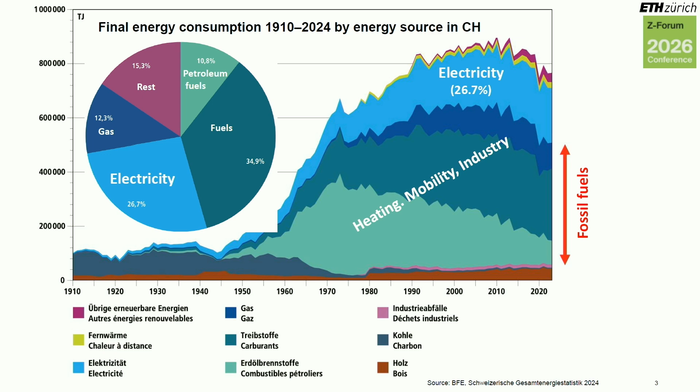Now, if you look at Switzerland, what's interesting is, very often we only speak about electricity, but electricity is only 26% of the energy that we consume. The majority of the energy that we consume comes from heating, mobility, and industry, and this is for the majority fossil fuel that we import.

When we are talking about energy, we cannot talk about energy if we don't talk about the energy trilemma. The energy trilemma has 3 pillars. The first pillar is environmental sustainability. So what is sustainability?

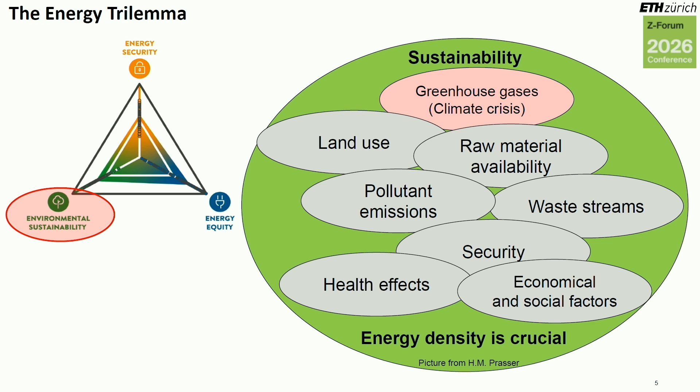It's a little bit in this bubble - again, this tunnel vision, we focus very much on greenhouse gases, so CO2 emissions. But in reality, sustainability includes also how much land we need to produce a kilowatt hour, how many materials we need, how much waste we produce, and so on.

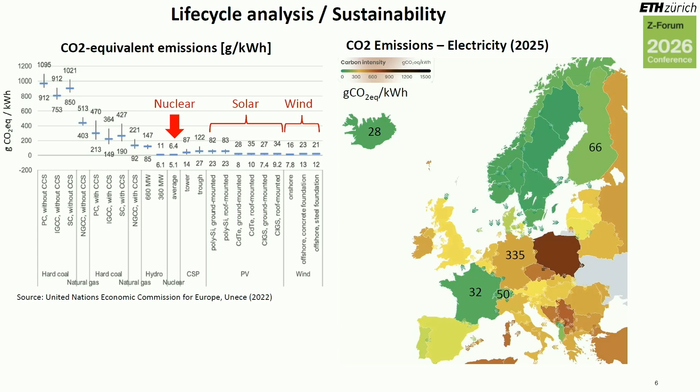So Switzerland is already one of the few countries that has a decarbonized electricity production, not energy, right? Still a lot of fossil fuel for heating, industry, and mobility, but not for electricity. And so the good countries are Iceland, Norway, Finland, Sweden, France, and Switzerland.

If we look at what is the electricity mix of these countries, we will see that all these successful countries have as a mix renewable plus nuclear, with the exception of Norway and Iceland. However, Norway has 90% hydropower, and Iceland has 70% hydropower and 30% geothermal.

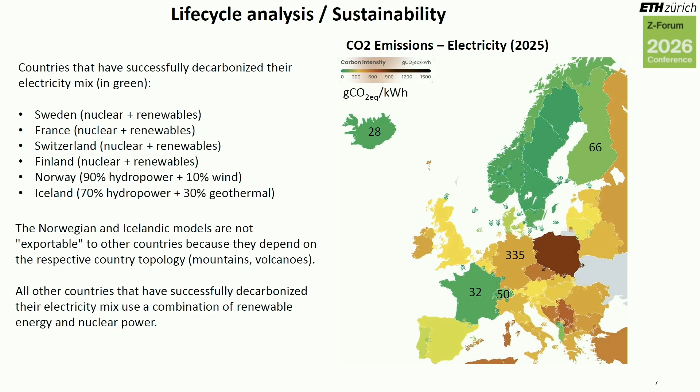I always say, we cannot build mountains, we cannot build volcanoes - this is actually what they have in Iceland. So these models we cannot export to other countries, but the model that can be actually reproduced everywhere is the model renewable plus nuclear.

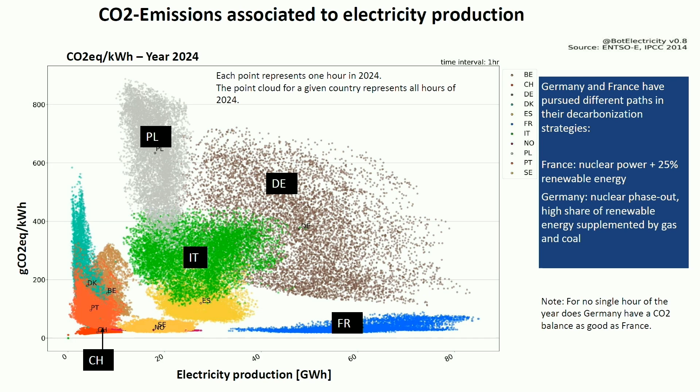What you see on this picture is also very interesting. Every cloud of colors is one country - you see Germany, Poland, Italy, Switzerland is here, France is in blue. Every point in this cloud is 1 hour of last year. What's interesting is that there is not a single hour in the year where Germany is better than France - I don't say the same, not even the same. So basically, Germany always emits more than France, and so on.

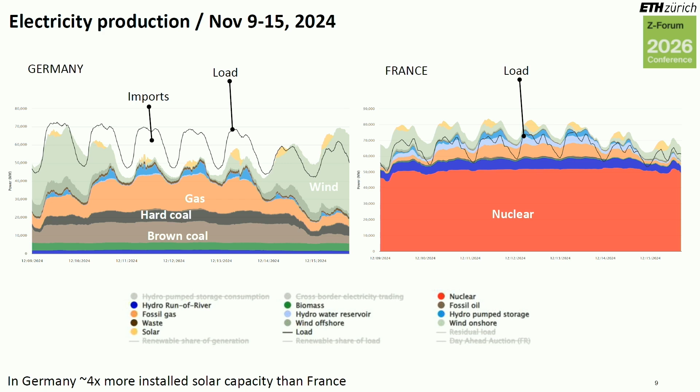Now look at France in the winter. They have a huge amount of nuclear, and then a mixture of renewable - hydro, wind, solar, and so on. Black is also what they need, so what you see is that they always produce more than what they need. France is the top exporter of electricity in Europe - they export all the time, in winter and in summer. They export around net 80 terawatt-hours per year.

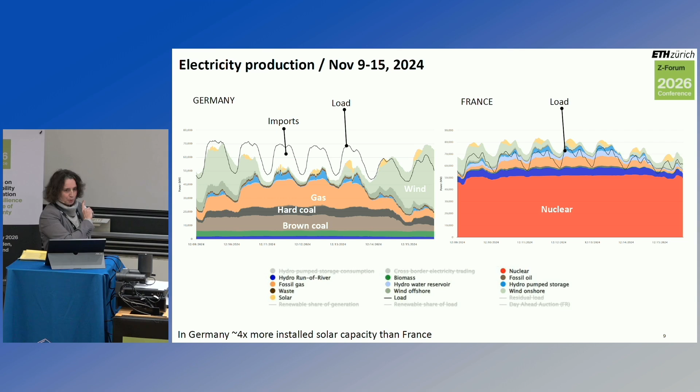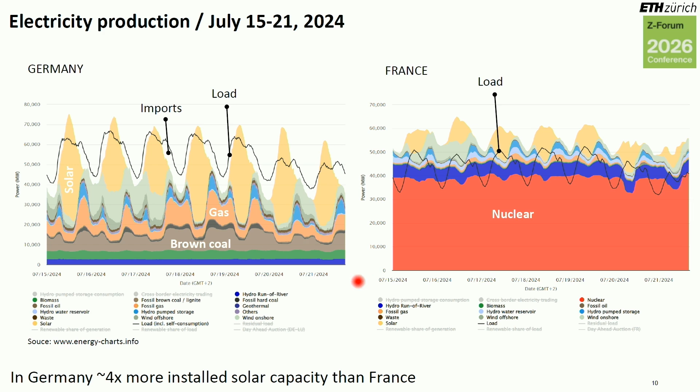This is why there is not a single hour in the year where Germany is, I don't say better, but at least equal to France. And then you see France in summer, they have a little bit more solar, of course, because the sun is shining more.

Now, in the energy trilemma, I discussed the greenhouse gases, and I cannot discuss all these bubbles, but very important is the raw materials. What you see on this picture on the right is the mining intensity, basically how many kilograms of material we have to move in the mine to extract the minerals and other material that we need to produce one gigawatt-hour of electricity.

Everybody, when he thinks about nuclear, thinks, yeah, we have to extract uranium. Very true, and here in gray is the uranium that has to be extracted from the mine per generated gigawatt-hour. But you see that for the others, solar, wind, onshore or offshore, you have to move material in the mine even more than for nuclear.

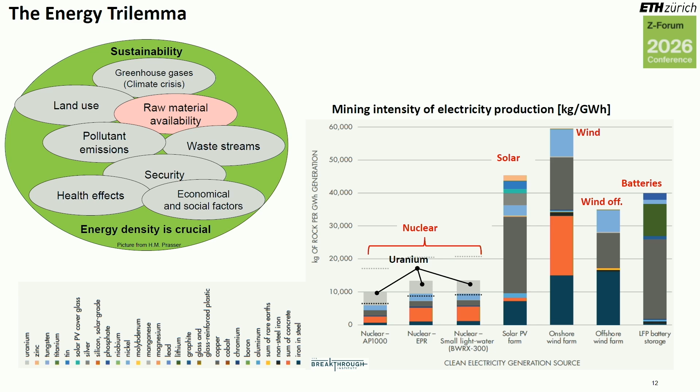And why is that? Because in nuclear, you have a very, very high energy density, the highest energy density that we have on the planet. This is why per unit of generated energy, you need to extract less materials.

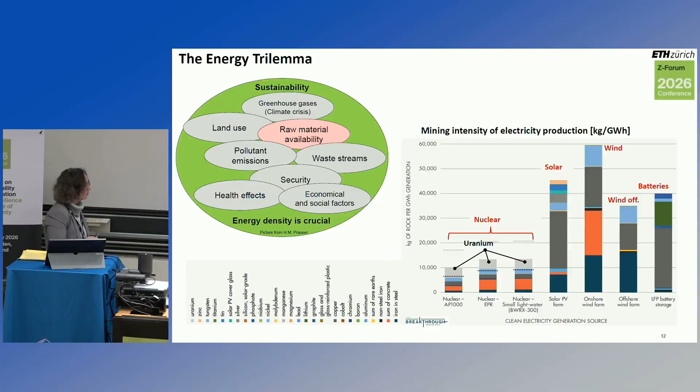Okay, then there is the energy security. Energy security means, do we have a reliable energy supply? Do we have this energy when we need it, and are we resilient to shock? If there are geopolitical changes like the Ukraine war, and now like what's happening between China and US, are we still safe? Can we still produce the electricity that we need?

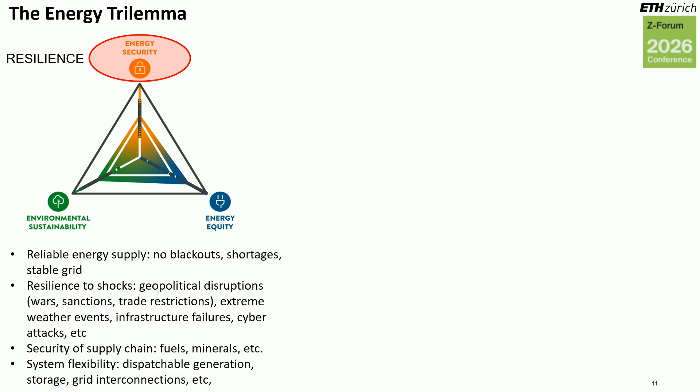If you look at the risk identified for Switzerland by the Federal Office for Civil Protection, what you will see is that the event that has the highest probability, and not only that, the highest damage in money, is actually a shortage of electricity. It can happen once every 30 years.

There are recent examples, not in Switzerland, but for example in Texas, February 2021, there was an extreme event. There was a windstorm, a snowstorm for 10 days. They had a blackout for 10 days. 250 people died, people literally died frozen in their own houses or in the hospital because there was no electricity for respirators, for dialysis machines. Cost $300 billion in damages.

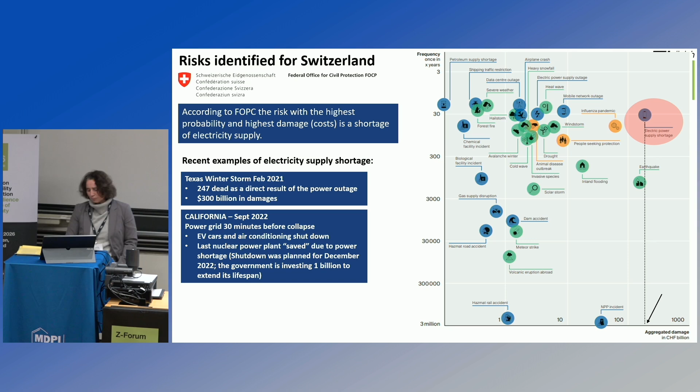California, September 2022, they were half an hour away from a complete crash of the grid. They sent SMS messages to all mobile phones in California to ask people to shut down everything they could, washing machines, air conditioning, and so on. They managed. And then they decided to save the last power plant that was supposed to shut down three months later, because California had done exactly what Germany did. They said, no, we cannot shut it down. So now they invested $1 billion to extend the lifespan of this power plant by 10 years. So again, let's buy some political time.

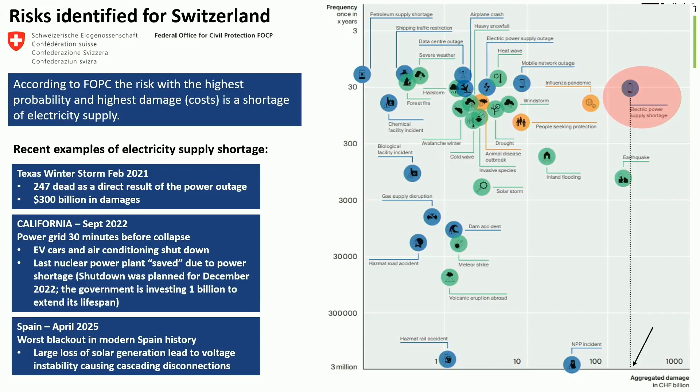And then Spain, you heard last year, right? Worst blackout in modern history in Spain. Initial cause was a loss of solar generation, but that was not really the problem. The problem was the grid was not resilient. So a perturbation led to a cascade effect where basically everything else shut down.

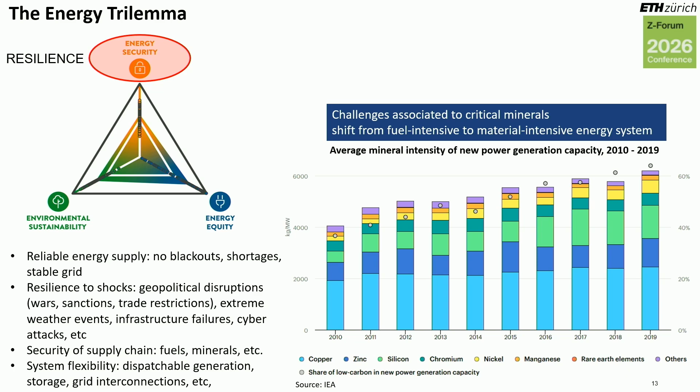Now, what is the issue also with energy security is dependence on geopolitics. What you see in this plot is that the mineral intensity of the new generation capacity is increasing. So basically we are phasing out fossil fuel, but we need more materials to build the solar panel, wind turbine, batteries, and so on. And this material, as I showed you before, has to be mined. And where are those materials? Now here you see what is a little bit scary.

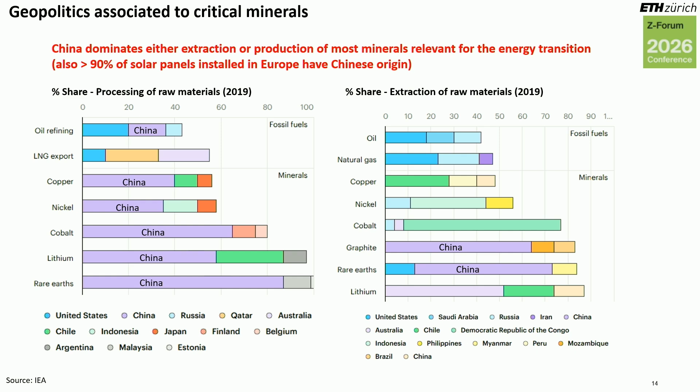We have to extract the material from the mine, and then we have to process this material. Now you see that color violet, this is China, and China dominates these minerals and materials either in the extraction or in the processing of the raw material. But dominate means you see more than 80%. As a matter of fact, 96% of the solar cells today are produced in China, and 90% of the solar panels that we use in Europe are coming from China. And with the current geopolitical situation, I'm not sure.

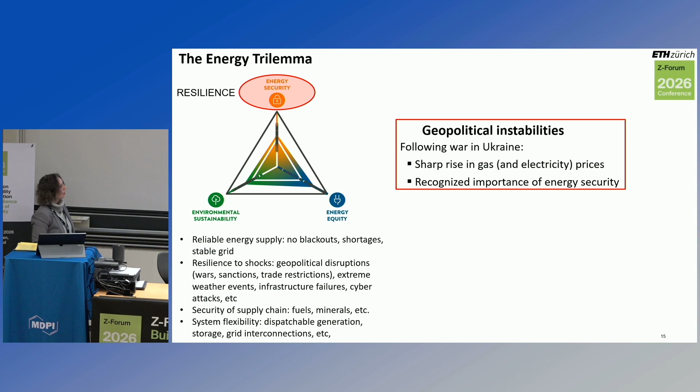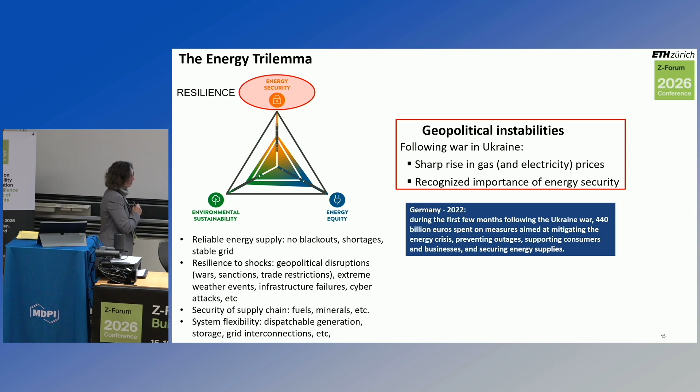Then we saw also the geopolitical instability due to the war in Ukraine. The increase of gas and electricity prices recognized the importance of energy security. For example, Germany, strongly dependent on gas from Russia, in 2022 within the first few months had to pay 440 billion euros for a temporary measure to mitigate the energy crisis and decrease electricity prices for industry. Otherwise they would have had to shut down everything. So energy security is important.

And then energy equity. Energy equity means, can we afford this electricity? Is it payable, or can only the rich have it while everybody else cannot? This is one thing. The second is: is it cheap enough to keep our industry competitive in the global market? Because if our energy is expensive, our industry will produce too expensive products.

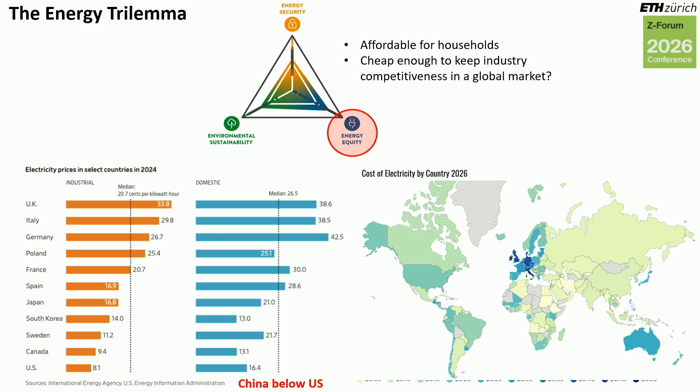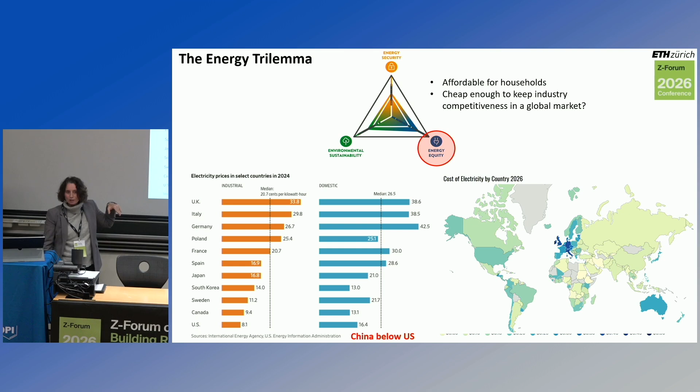Now look at the picture. The cheapest is China, followed by US, and where you see the dark expensive color, that's Europe. You see it better here: in industrial electricity prices last year, UK is at the very top, then Italy, Germany, Poland, France, and at the very bottom, US. There's a factor of 3 or more expensive here, and China is even below the US. So how can we compete with the US and China if our energy prices for industry are 3 or more times more expensive? This is what we have to consider.

Now here is the plan for Switzerland. Right now the plan is to phase out nuclear. If you look at 2050 — and these numbers don't yet include the boom of artificial intelligence — basically if we want to electrify industry, heating, and mobility, we will need at least an additional 25 terawatt hours per year on top of what we produce today. And by 2050 we have to say goodbye to our nuclear power plants, which now produce 23 terawatt hours per year. That means in addition to the 25 terawatt hours, we need 23 terawatt hours of alternative to nuclear. This is why I always say, if we don't replace nuclear with new nuclear, we make our problem twice as challenging.

There are many studies, I'll take just one, the latest from last May, from the Department of Energy and several universities and research institutions in Switzerland. What do they say? If we want this 2050 scenario and also phase out nuclear, we will need at least 28 terawatt hours of solar, 13 terawatt hours of wind, plus biomass. And because these are weather dependent and not dispatchable, we will need to increase imports in winter and also need some gas as backup.

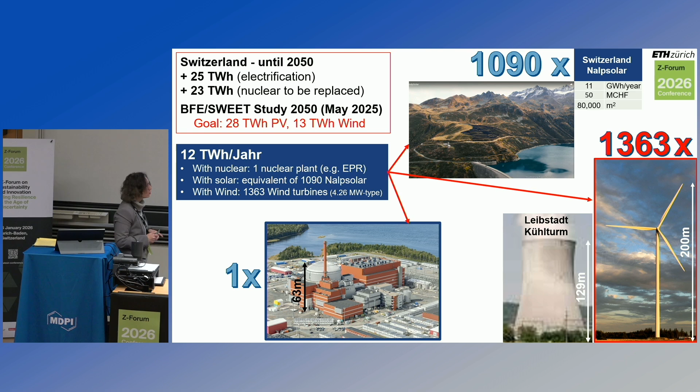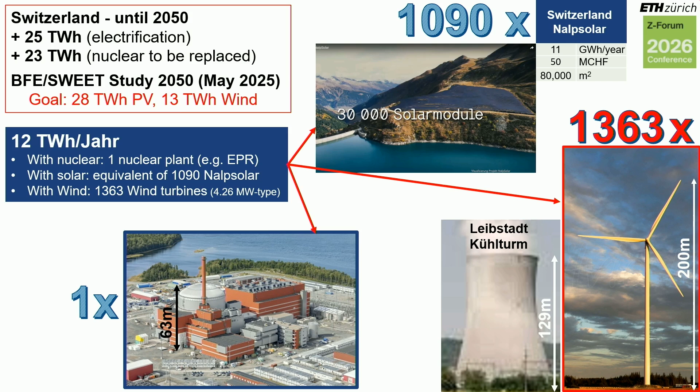The question for me is, can we do it? Can we build so much in 20 years? Because this is actually what we have. And of course, we also have to build the grids, and the grids are even worse because you need permits and so on, it takes 10 years to have a grid project.

If you look at the conclusion of this study, you still need subsidies. There will be an increase in electricity prices if Europe does not export to us everything we need. We need gas backup and so on. Also important, if we need synthetic fuels like hydrogen for aviation and mobility, the production would require solar power plants on a scale that cannot be built in Switzerland, because we have limited land. If there's one thing we don't have much of here in Switzerland, it's land.

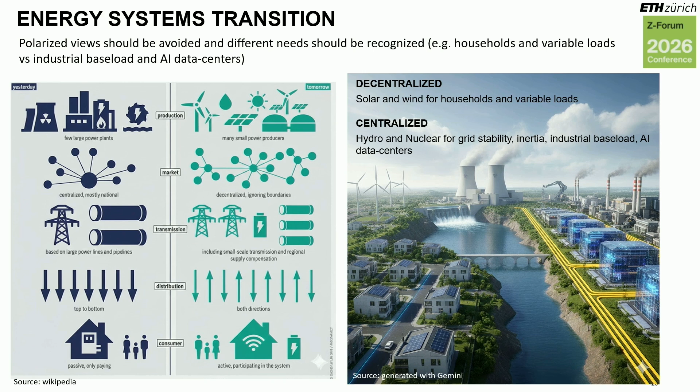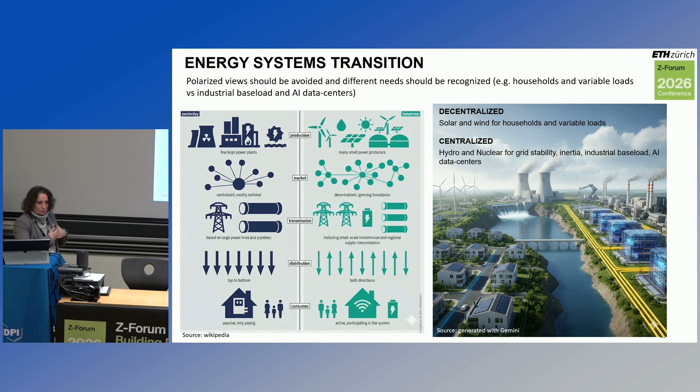In reality, if we think about it, we have a mix of users. We have households and companies that have variable load, but then we have industry that needs electricity 24 hours a day. This industry cannot afford electricity coming from weather-dependent sources. So in reality, we should have a hybrid grid, a mix of decentralized and centralized, with different clients for different parts of the grid.

For nuclear, something I'd like to mention is the new technologies coming, small modular reactors. These are smaller reactors. They will cost less because they are smaller, so they produce less electricity. It's not that the electricity will be cheaper, but at least the machine is cheaper, so more people and companies can invest in those. And they're not sci-fi — Russia and China are far ahead of everybody else.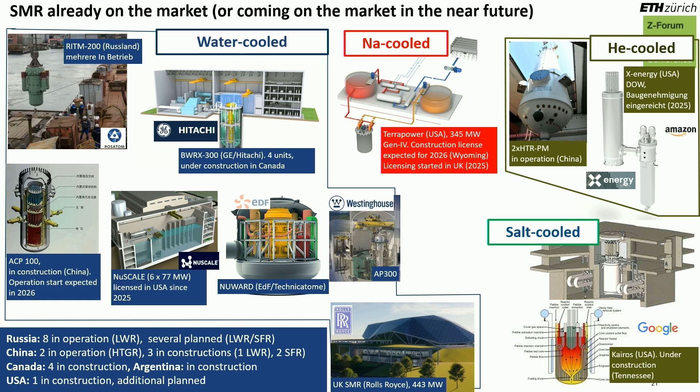They're already operating this type of power plant. Nuclear, Europe is waking up now, and the US finally woke up. Now in the US, they have a lot of plants which are either in construction or where they've asked for the construction license, actively waiting for it. For example, the liquid metal reactor from TerraPower, the company from Bill Gates and Microsoft, is waiting for the construction license at the end of this year. The same for X-Energy, which is getting money from Amazon and Dow Chemicals.

So now we have this bottom-up approach, if you want, where you have clients that do the direct orders and so on. This is actually what's coming. And we see bottom-up examples in nuclear in Europe too. For example, I'll mention two.

One is Finland. They are developing a very small reactor underground meant only for district heating. It's a very small reactor, it does not need a turbine because it will never produce electricity, it's only to produce hot water to distribute to a grid. The grid is already existing, the district heating grid is already existing, they just have to change the heat source.

Here in Switzerland it's the opposite. We have a district heating grid connected to Beznau, and Refuna is the company in Aargau that manages this. Unfortunately for Refuna, Beznau will be shut down in 4 years. So they looked for an alternative, and the alternative for Refuna is wood pellets. They will need 38,000 tons of wood pellets per year, transported by 1,700 trucks per year. So much for environmentally friendly.

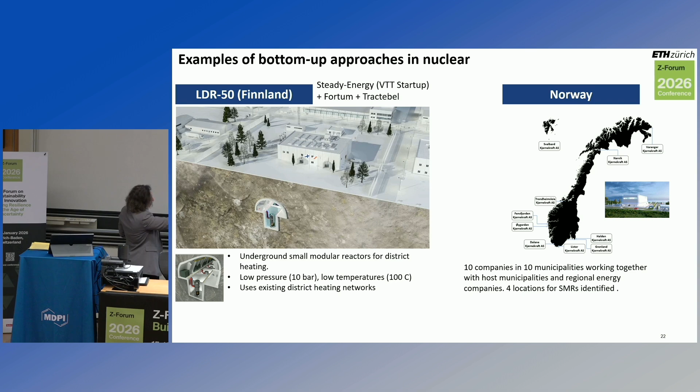The other example is Norway, also very interesting bottom-up. Here is basically a group of 10 companies in 10 municipalities that went to the government and said, you don't have nuclear, but we want it, so please make sure we can do it. They identified 4 sites for this small modular reactor, and now the process is a very bottom-up process.

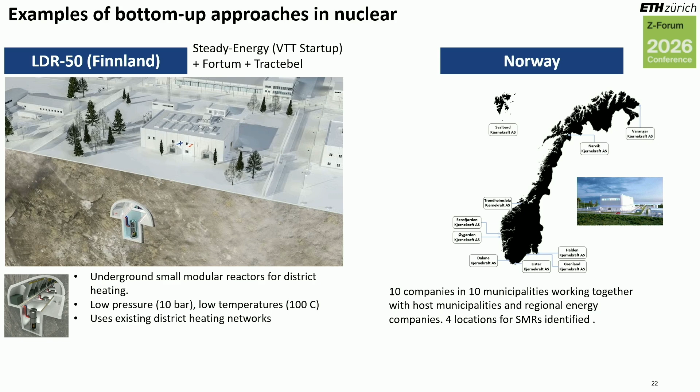So now my conclusion, personal opinion, because I have to say I'm not an expert in energy systems, I'm a nuclear engineer, but I just look at the systems. Bottom-up projects are very suitable and easy for small plant sizes. For renewables, where the plants are always small, solar and wind, we've seen several successful examples here in Switzerland already. Now, bottom-up in nuclear is more complex because the plant is bigger, you need more money, the process is more complex.

For this, you need a consortium, for example you would need cantons, the municipalities. The interesting thing with nuclear is that municipalities that have nuclear are very much in favor of it, because they are familiar with the technology, they are not afraid of it.

Because, of course, if you have a nuclear power plant, you have a lot of jobs, not only in the power plant, but in the municipality, because now there are hundreds of people working there. So you need new supermarkets, hair salons, and whatever, right? So basically there is a lot of job creation for the community, and there is, of course, tax revenue coming in.

So the tax rate in these villages is smaller because of the power plant. And in fact, here in Switzerland, all the villages who already have a power plant have said they want the next one if there is one built in Switzerland.

Then you can make a consortium, for example, with pension funds, because pension funds invest long-term, while companies typically want investment very short-term. A power plant has a lifetime of 80 years, so you need these long-term investments.

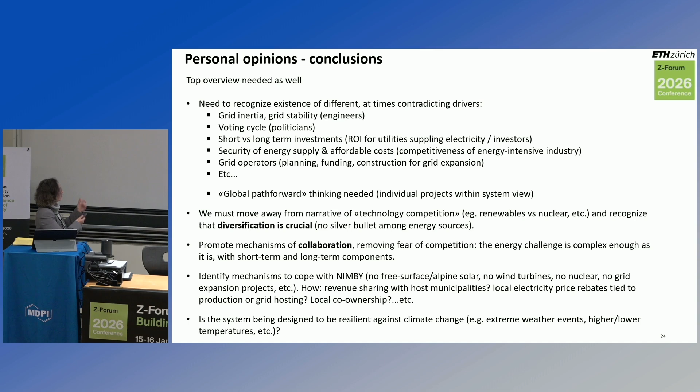For geopolitical issues, so that if something is affected, the other one is not. Or if the weather is bad, something else is working. We have more flexibility.

And of course, to me it's important that we promote a mechanism for collaboration, because right now there is always this constant story of renewables against nuclear. There is this fear that if there is money for nuclear, there is no money for renewables. But as I think I showed you, the challenge is so big, there is actually a place for everybody.

I don't think there is a silver bullet. We cannot do it alone with nuclear. You cannot do it alone with renewable. We need everything.

Okay, and then this is the thing - we have to identify mechanisms to cope with the not-in-my-backyard problem. And we see it also here in Switzerland, that people are against everything. They're against alpine solar. They are against wind turbines. They're against nuclear. They're against the grid. And then at the end, we don't build anything.

So how to do this? Maybe sharing of revenues with host municipalities, maybe rebates on electricity prices for the communities hosting this, local ownership, and so on.

And this is my very last point: we are talking about climate change, and we design systems based only on weather-dependent energy sources. Good luck with that.